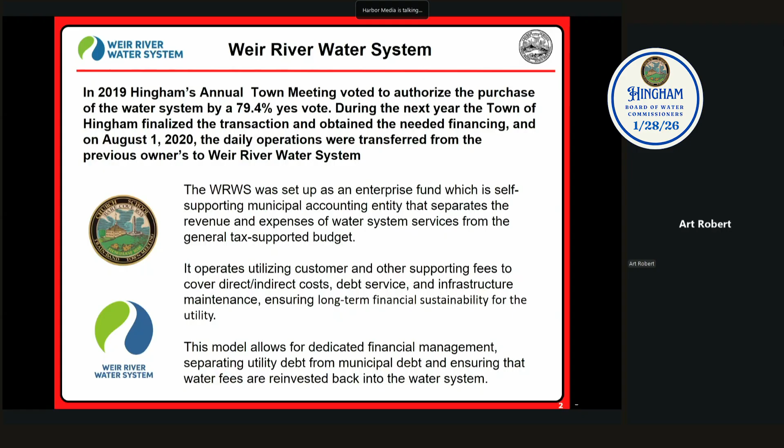What are our missions and services? To provide outstanding customer service to our customers in Hingham, Hull, and North Cohasset, while continuously supplying the highest quality water and improving the water system infrastructure. Our services include water treatment, distribution system operation and maintenance, billing services, customer service, 24-hour emergency repairs and response, capital improvements, public outreach and education, and water conservation.

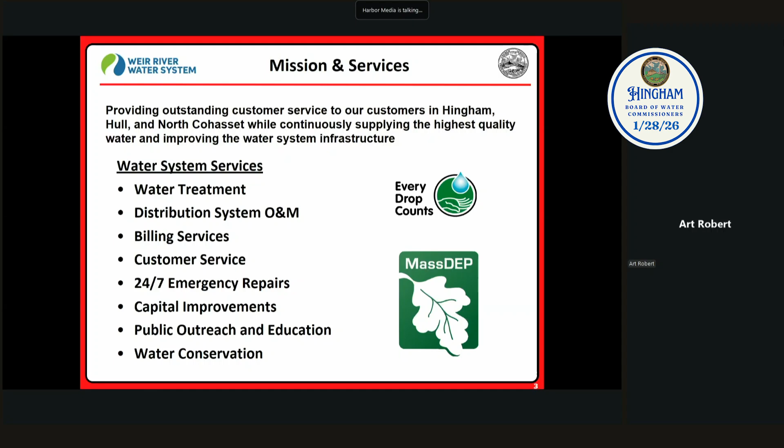What are our key initiatives? Our key initiatives are as follows: focus on water quality by continuously reviewing and improving our preventative maintenance programs, annual water main replacement projects, and annual water treatment plant upgrades. In June of 2026, we updated and improved our GPS coordinates and GIS mapping. I'll get into that a little bit deeper later.

In March of 2026, we're going to finalize a new meter reading system with a focus on accuracy and conservation. In January of 2027, we're going to utilize our new GIS system for asset management.

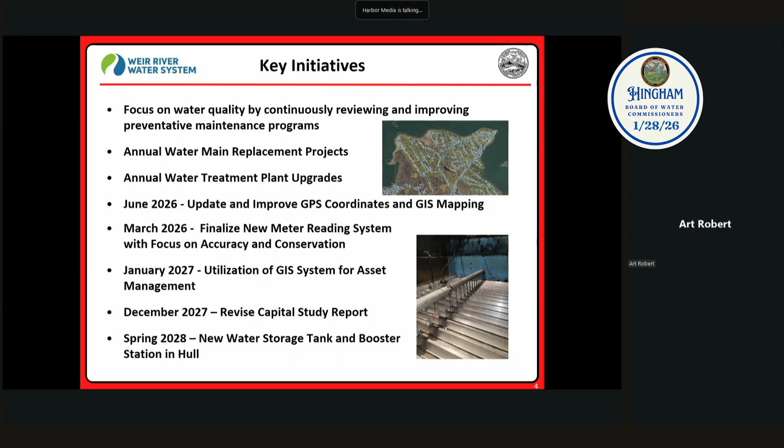In December of 2027, we're going to revise our capital study report. After doing all this work for 5 years, we're going to revise the report to focus on the areas that need to be focused on, because those do change as the years go on. In spring of 2028, we're going to have a new tank in Hull and a new pump station in Hull.

This is basically our contract operations, how it looks if you look at an organizational chart, with myself and Brian at the top, down through Veolia and everybody that works for Veolia. We also have administrative help from Liz Welch, who does work for DPW, but she does help us out from time to time.

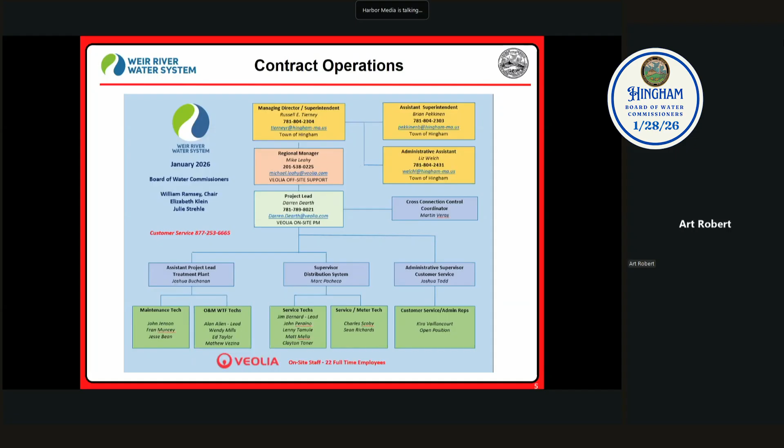Financial stability, what have we done? First 3 years, we were required to have a 1.0 debt service ratio, which is the ratio between our debt service and how much we'll have left over after our budget, so what we have for reserve funds. We met that in FY 21 through 23 to meet the requirements set forth when we bought the system. It was required by the lenders to make sure we met those requirements.

We have $1.5 million right now in retained earnings. That's about 10.3% of our annual revenue. Our goal for retained earnings is about 17.5%. We could go to 20, but we're going to stay with 17.5 until we reach it, and then we'll go from there.

Capital improvements over the past 5 years: $7.1 million in the distribution system and $5.2 million in the treatment facility. The MCAP, which is part of our contract with Veolia, they hold a certain amount of money, about $712,000 per year, which we pay them over the months. They have that money for repairs in the plant and the distribution system. It's not capital work; it's all the repairs and maintaining of the system.

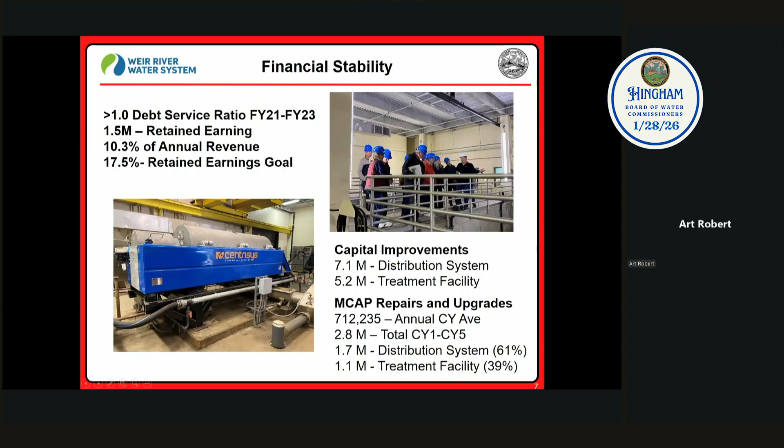More on financial stability: we secured a $2.7 million PFAS class action settlement. A bunch of towns got together and sued the makers of PFAS. We got in on this class action settlement and received a $2.7 million check, which has been earmarked aside for just PFAS treatment. Right now we're using it to do a study of the plant, which I'll go into more later, and we're also going to utilize it for any upgrades we need for the plant to meet the new PFAS regulations.

We also secured $250,000 in a GIS grant, which was part of going around getting GPS readings of all our assets and putting that into our GIS system, making it more useful for the workers in the field, for us in the office, and for everybody doing design work for the town, for the Weir River water system.

We also got a $750,000 lead service line inventory grant. One of the newest things is the state wants us to know what kind of services are on the owner's side of the house. On our side, we have documentation of just about every water service and its material, but we don't have documentation of what the owners have on their side. This grant allowed us to go through all of our records, digitize them, bring them into one big spreadsheet, and build a platform where we can go in and actually enter them.

So if we go into a house, we find out they have a copper service, we go onto this app, we put it in as copper service, and now that's going straight into the inventory. This inventory is part of the new lead and copper rule, which is kicking off later in 2027-ish, where we have to have this all done.

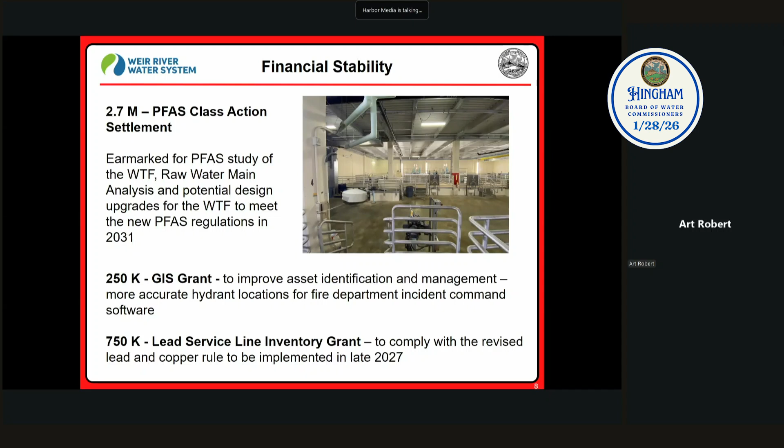Got it. Continuing with water quality. So per- and polyfluoroalkyl substances, which is PFAS, the Mass DEP MCL is 20 parts per trillion. Right now, the Weir River water system's running average is 5.12 parts per trillion.

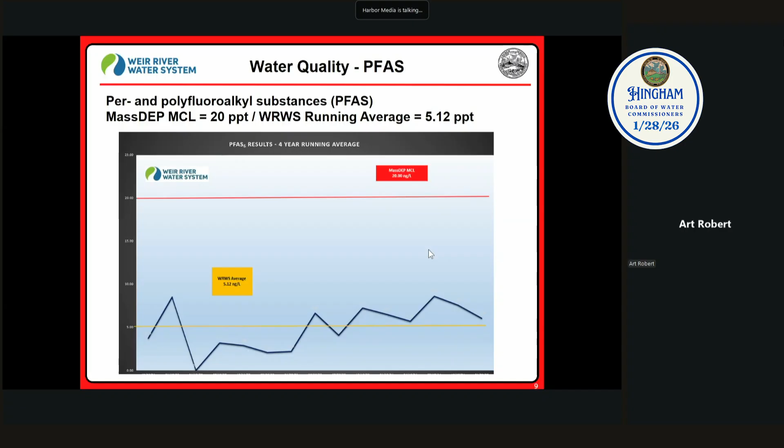So we are well below the Mass DEP regulations. The new regulation, if you look at this graph right here, the red line is actually the DEP MCL. This yellow line is our average, so we're well below. Every quarter we take these samples. If we exceed 10, we go to monthly sampling, but right now we've never exceeded 10, so we're doing well. And it's a rolling average, so if we do exceed 10 in one quarter, it's not until that factors in as a rolling average that we'd go over the 10. So if we do have a 10, we still have more time to make that up so we don't have to go to monthly sampling.

Water quality: the Weir River water system is in full compliance with the current lead and copper rule requirements. Our continued sampling under these current rules shows that our water system is below action levels. The Weir River water system exceeds the requirements set forth by Mass DEP on lead in schools.

What Mass DEP requires is that you sample a certain number of schools every time you sample. And if you do it on a 3-year schedule, a school could get sampled every 12 years. So we decided to be proactive, and we sample every single school that has children in it in this town every time we sample, every 3 years. We take samples there and pay for it on our own, and then we report those back to the school. In 2024, our lead results were 0 milligrams per liter.

The action limit is 0.015 milligrams per liter. Our copper results were 0.47 milligrams; the action limit is 1.3. So again, the Weir River water system meets or exceeds the Mass DEP sample requirements as outlined in our 3-year water quality sampling schedule.

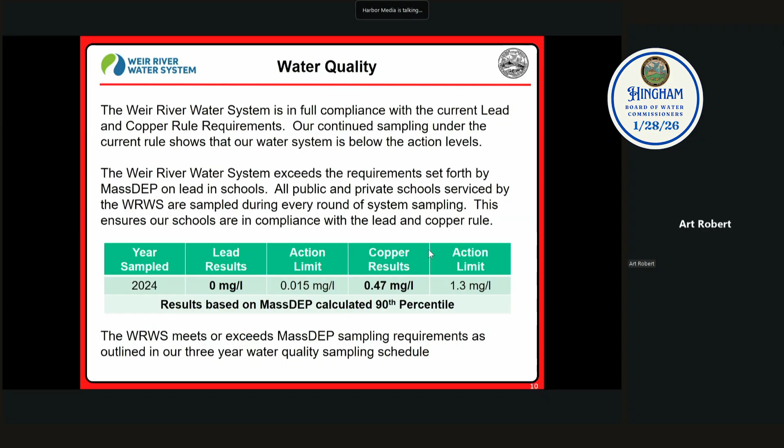More on water quality: sampling is focused on raw water, finished water leaving the plant, and distribution system parameters, which include total coliform bacteria. Again, we meet and exceed all those requirements. These parameters, along with our own in-house process control sampling, provide our operators information on the treatment process. We actually take samples every 2 to 3 hours in the plant. We have our own lab where we take samples and continuously watch and monitor what's going in and out of the plant. This allows us to make adjustments to our chemical dosing—we're not overdosing, we're not underdosing, and it just keeps everything running smoothly.

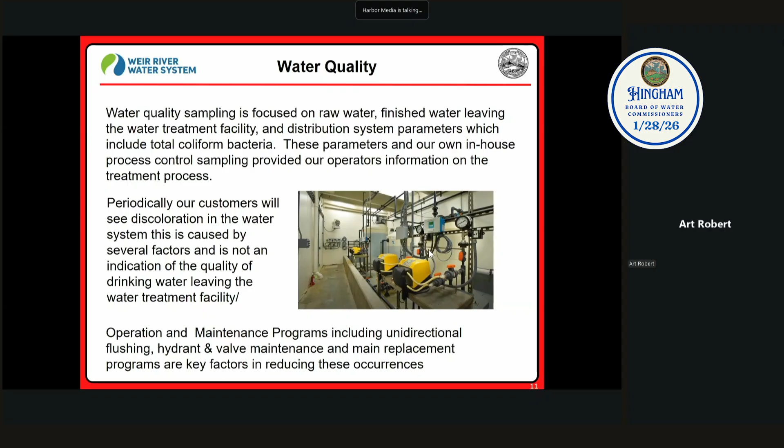Periodically, our customers will see discoloration in the water system. This is caused by several factors and is not an indication of the quality of drinking water leaving the water treatment facility—it is absolutely not an indication of that. It's in the distribution system. Operation and maintenance programs like unidirectional flushing, hydrant and valve maintenance, and main replacement programs are key factors in reducing these occurrences. Just for information: sediment disturbances.

Sediment disturbances and accumulated iron and manganese in the system—naturally occurring minerals like iron and manganese settle in the pipes over time. Changes in water velocity, such as from hydrant flushing, firefighting, or heavy demand, stir up these particles, and that's what everybody is seeing. System maintenance and breaks: a water main repair, valve work, construction activities can also cause sudden pressure changes as we're operating valves to do this work.

Again, that can also dislodge sediment from the mains. What are you seeing when you see yellow, brown, or red color tint in your water? That's an indication of rust and iron and some manganese. If it's black, it's 100% manganese.

If people have that in their water at any time, just call the office or send an email to our water quality email. We'll send someone out right away to open up a couple hydrants just to bleed off that manganese that's been disrupted from the bottom.

A milky cloudy appearance is usually caused by trapped air in the pipes. A lot of people don't see that unless we have a really high demand in the higher elevation areas. But if you see that in a high elevation house where you live, please call the office. We can go up there and see what's going on. Maybe something's closed that's not allowing the water to get up there, causing a little air pockets here and there.

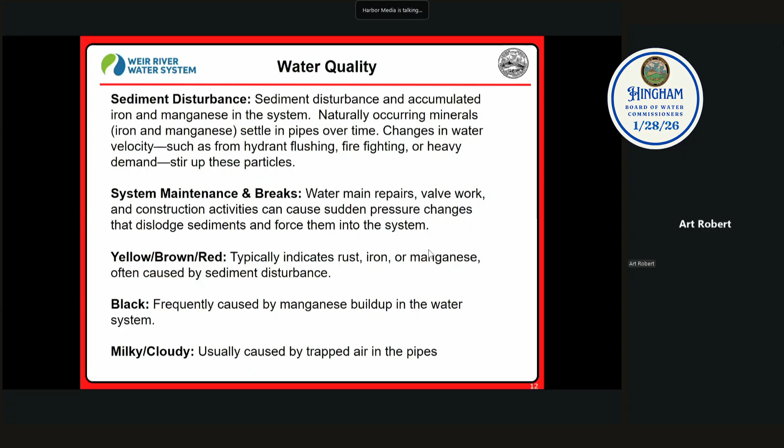I'm going to turn this over to Brian for 5 minutes, give my voice a break and give you guys a break from me. There'll be questions at the end, sir. No, it's just a comment about that — there'll be questions at the end.

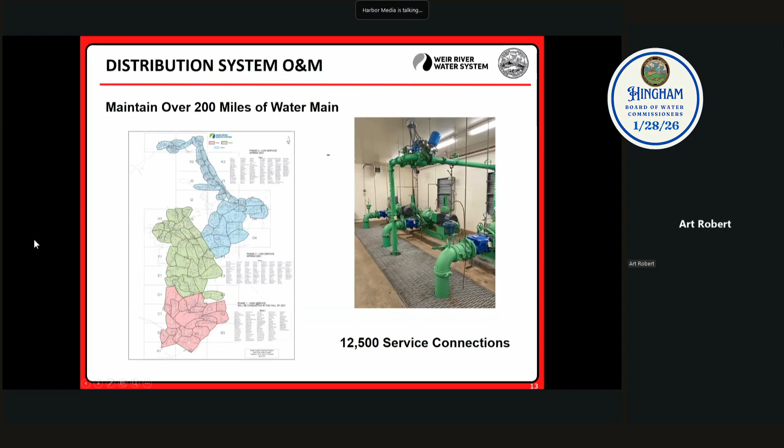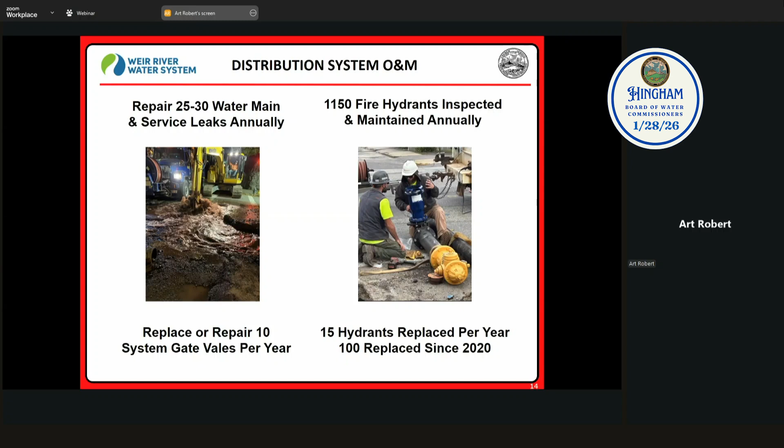We maintain over 200 miles of water main and 12,500 service connections. We repair 25 to 30 water main breaks and service leaks annually. We inspect 1,150 fire hydrants and maintain them annually as well. We replace or repair 10 system gate valves per year, and 15 hydrants are replaced, with 100 replaced since we took over.

This fall we started our annual system-wide unidirectional flushing program. I think it went very well, we started down in Hull. Part of that is also the 3,200 system gate valve inspections. We inspect 310 a year, which is really important for that program, because it only works if your valves work.

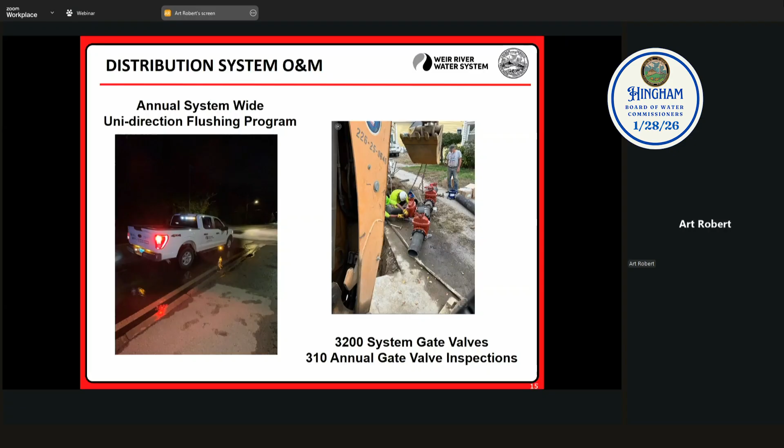The treatment plant is a 7.2 million gallon per day treatment facility located at 900 Main Street here in Hingham, and it was built in 1996. We treat and distribute 1.2 billion gallons of potable water from 11 water sources, including Accord Pond.

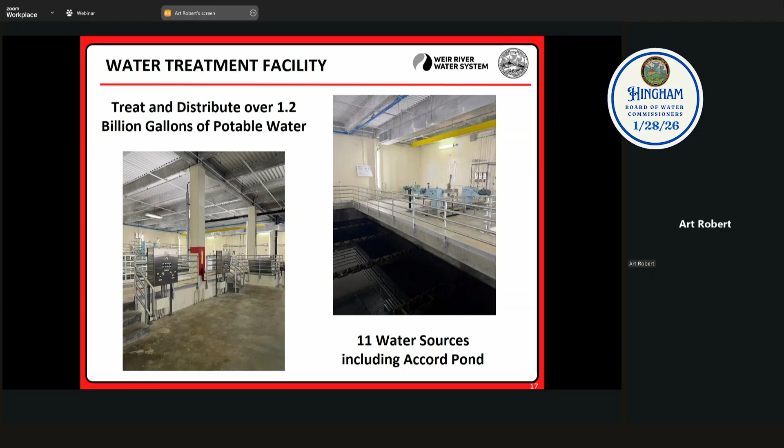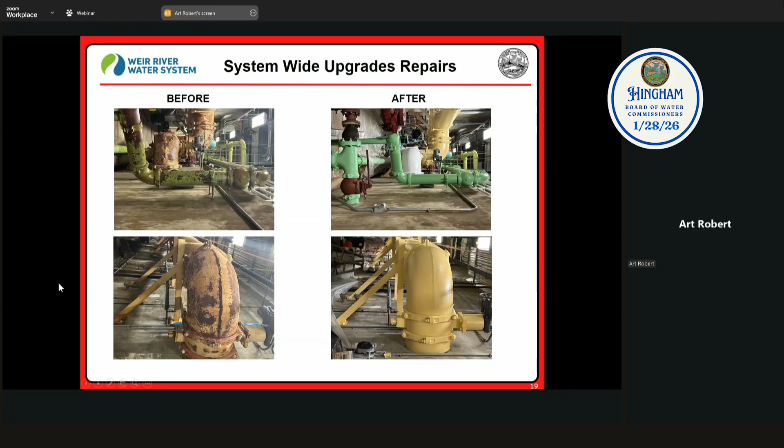This is one of the wells. We rehabbed the shed around it and painted the fire hydrant.

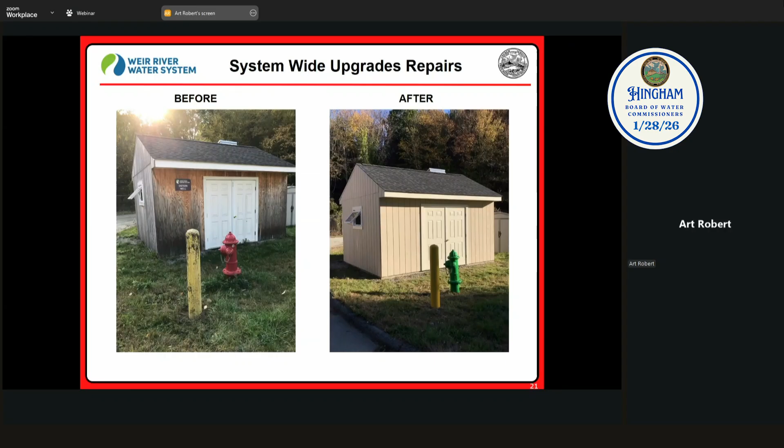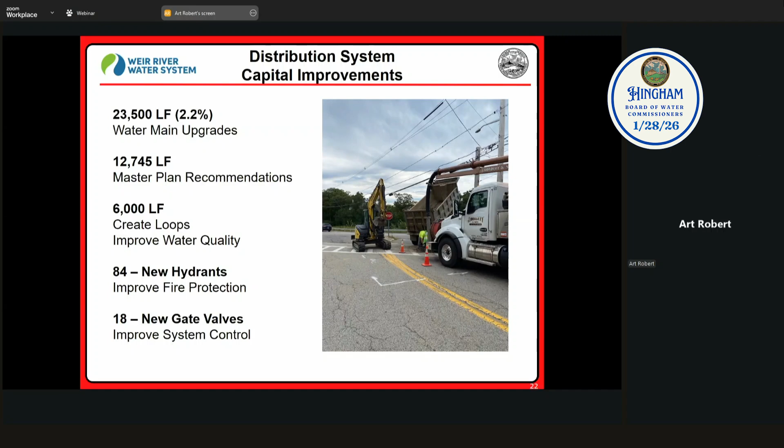Capital improvements so far: 23,500 linear feet of water main upgrades, about 2.2%, have been done. 12,745 linear feet of that was from the master plan recommendations. 6,000 linear feet created loops that help improve overall water quality. 84 new fire hydrants were added to improve fire protection, and 18 new gate valves improve system control.

I'll hand it back over. Thank you.

One thing we want to make clear about our O&M services is that those hydrants and valves done through the contract — we also do additional hydrants and valves and capital work and things like that. So it's not the only ones we're doing, but we just want to give everyone an idea of what Veolia's responsibilities are to the town with the water system.

Future plans: the need for a new water storage tank within the Weir River Water System distribution system was priority one in our master plan. So when we did the master plan in 2022, that was the first thing on the list — a new tank.

After reviewing what was proposed prior to us purchasing it, we realized that the tank was not only undersized, but it also could not be fully utilized the way it was constructed and designed. We immediately went in and did an entire new study, a hydraulic model and study, to make sure that the money we're investing is used to the best of our ability. What we did find out is we made a separate pressure zone.

So we're going to have 3 pressure zones going forward after this tank is done, because the best way to get this tank—1 million gallons in Hull—utilized properly and be a large benefit to the town of Hull and North Cohasset is to make it its own separate pressure zone.

What this does is gives us water system redundancy. Currently, we have 1 tank in the entire main service, which is Turkey Hill. Turkey Hill has not been rehabbed since the day it went up. That tank desperately needs to come offline and be completely rehabilitated. It won't be replaced, it'll be rehabilitated, which means we'll strip it, paint it, clean the inside, make some repairs, and then put it back in service.

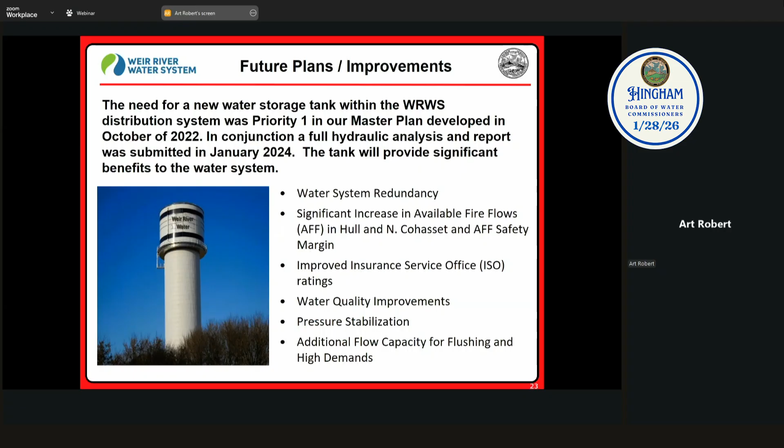A water booster station, pump station, was required to fill this tank to capacity and utilize it exactly how it should be done hydraulically. So we've now got a site in Hingham to fill the tank. We went and looked at 7 different sites. This was the best site for this—the most effective, the easiest to put it on—and we already have all of our approvals from the town of Hingham to put it there.

Again, it will reduce water hammer in the system. Water hammer is a part of a water system where if something changes direction or if there's a water main break, the hammer could actually cause even more problems than just that additional break. Water hammer is a big problem around here because of the fact that we do not have a tank in Hull. It could also potentially reduce the chlorine levels at the plant.

One of the things we looked at, and I was very hard on our engineers about, was can we add chlorine to the booster station so we can reduce the chlorine coming out of the plant? We have to maintain a certain chlorine level—we do get complaints about the odor of chlorine, but we need to maintain that level so we don't get bacteria in the water system. With this new booster station, we're adding a chlorine injection system where we can reduce the chlorine going in at the plant and then bump it up at the booster station. So instead of having 2.0 in the system, we can cut it down to 1.2, 1.1. Then everybody has the same amount, and it's not high right around the Turkey Hill tank or the treatment plant.

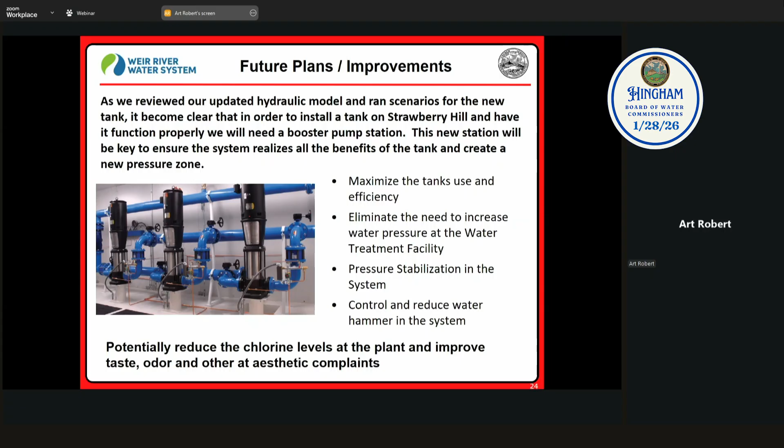Future plans for improvements: the Route 3A Rotary Summer Street project that Mass DOT is doing. We had a meeting today—these dates changed a little bit because Mass DOT hasn't approved our permits. We're working on that with our engineers to get it done, so we did get pushed out a little into maybe September to start construction. But again, we're on track. We're designing it, we're at 78% design, and that's a project for next year.

Manomet Ave and Samoset Ave—the town of Hull wants to completely reconstruct those 2 roadways. It's about 11,200 feet of 8-inch ductile iron water main. We were already designing it—I promised Hull that we would design it now, keep it in the drawer, and as soon as they're ready, we'll put it out to bid and do that job also. Then Main Street.

Main Street in Hingham has had a couple major water main breaks over the past couple years. We did do some serious investigation over there. Brian and a couple of engineers were out there for a couple of days. We found a couple closed gate valves. We opened those gate valves and the pressure fluctuations dropped significantly. So we are confident that that should stop these main breaks on Main Street. But again, we will keep a close eye on it.

We're going to do some other work to have an actually continuous monitoring system during the summer so we can always keep our eye on Main Street. It's the only area in town where we've seen this happen, where there's been significant fluctuations in pressure, and it cracks a 12-inch water main, which is about 1.25 inches thick. So we're going to keep our eye on that.

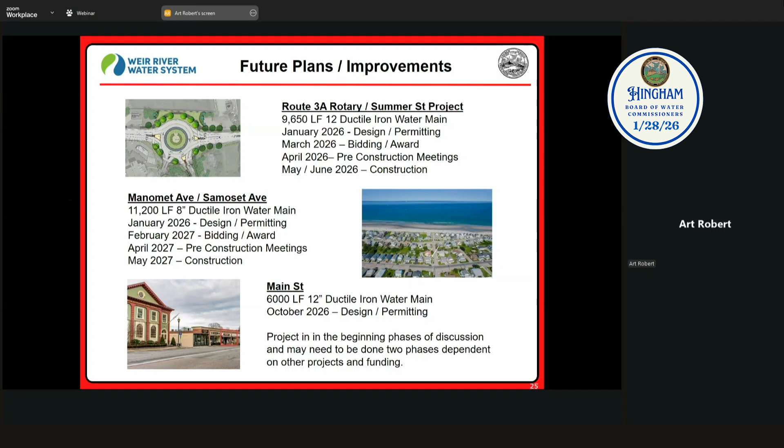PFAS capacity study. I was just talking about the PFAS money. We took the PFAS money and have a capacity study - are we going to be able to meet the 4s? In the future, there are 2 PFAS chemicals that you're going to have to get to 4 parts per trillion. Currently we're at 20. They've decided those 2 need to be at 4. Currently, 99% of the time, we meet that 4 the way we're treating right now. If our carbon gets depleted, it starts to go up a little bit.

So in an effort to make sure that we can meet that 4 by 2031, we're doing this study. We're going to look at the plan on how we can improve the plant and maybe add carbon filters or something like that to make the plant meet that 4, which is going to be required.

We have a new intake at Accord Pond. Upon the purchase of the water system, about 2 years into it, we realized that the intake that was about 300 or 400 feet out in the pond had been abandoned. They were using an intake that was closer to the shoreline. After we found this out, we took action to get it designed, and right now it's being replaced. We're going 427 feet into the pond at the best depth.

We took water quality samples all over Accord Pond to find the best water quality in the pond, and this is where it's at. It's the lowest PFAS, the lowest fecal coliform, and the lowest turbidity in the pond. So we've now put our intake at the best place in the pond to take water from it.

Then we're doing a raw water main analysis, part of the PFAS study. Some of our wells have some elevated PFAS, so we use those wells sparingly. However, this summer a couple of the raw water mains were not giving us enough water, so we had to switch to other wells. I brought in someone to look at those because we think there could be some kind of restriction in those raw water mains, so we're going to look at all of our raw water mains.

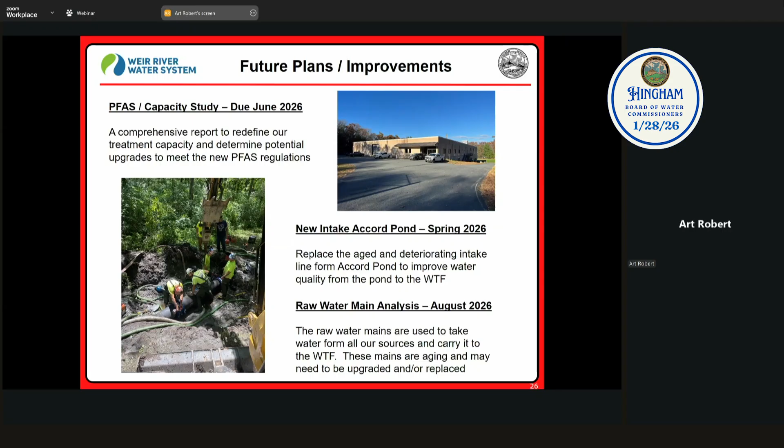So for people that don't understand, all of our wells and all of our sources come back to the plant on Main Street. Nothing that comes out of the wells goes directly into the distribution system. So these raw water mains are very key to the success of our water system, to get us the water to the plant so we can treat it and get it out. So that's ongoing also.

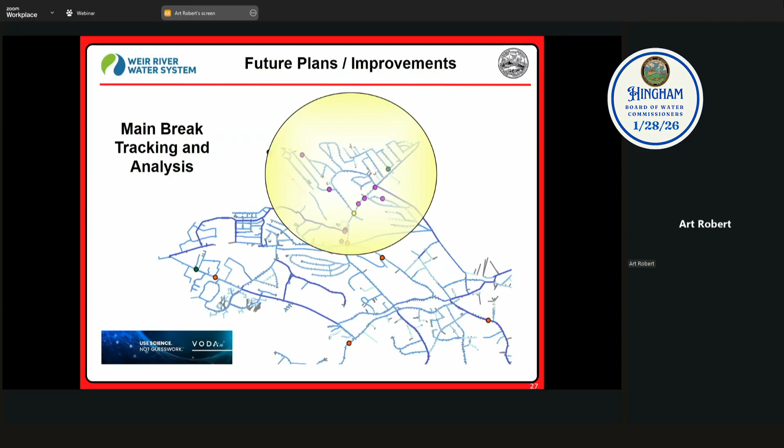This is what found our closed water main valve on Main Street. We set up 7 of these all around downtown Hingham and we found fluctuations in pressure. Then the engineers did their thing and pointed it down to a couple valves, checked those valves, and found out that they were closed. One of them had been broken closed, as far as we were aware, for 12 years, and we didn't know it was broken. That has now been repaired, replaced, and reopened.

And we have vaults. There are 12 vaults in the entire water system that were put in at one time for these pressure recorders. We went around, located all the vaults, and we're looking at them. Are they viable for us to use again? We're working on that now. That's another project we're working on.

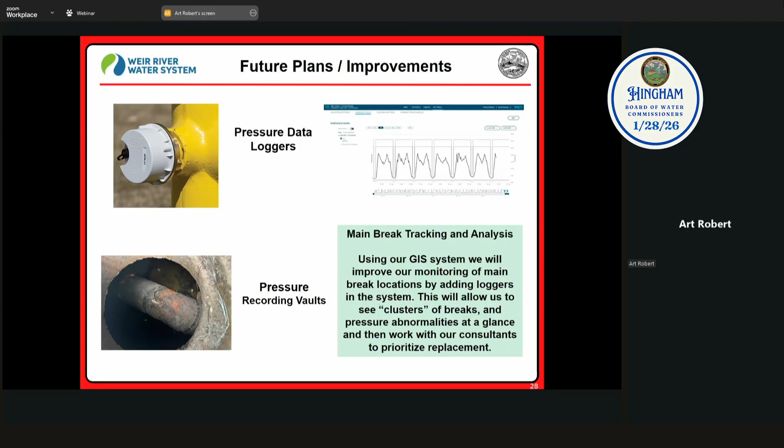Future plans: improvement, drought conservation measures. The Commonwealth of Massachusetts puts out drought measures every year. Currently we have a registered water supply. There are water supplies under the Water Management Act, controlled by Mass DEP. Registered water systems have a little, I'm not going to call it leeway, but it's not the same thing. We don't have restrictions, we don't have things we have to meet and all those things. But the problem is we do fall under the state's drought management.

Currently we are working on a new drought management plan to match the state's. So if the state's in a level 0, we're in a level 0. If the state's in a level 4, we are in a level 4. What that means to our residents is if we go to level 2, we cut down on watering. Level 3, cut down on watering. Level 4, no watering. We are working on that right now. I have it drafted, I have not presented to the board yet, but we're going to try and implement it in the spring.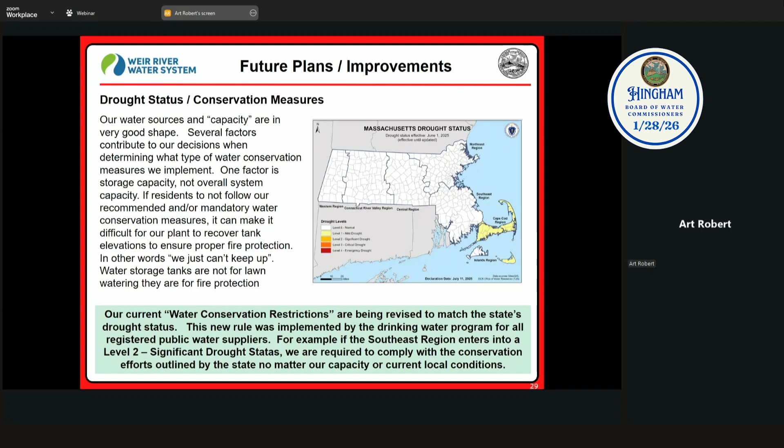It's kind of what it looks like. Level 0 is normal, level 1 is a mild drought, 2 significant, 3 critical, 4 emergency drought. Again, we will craft different watering plans for the summer and spring based on what the state is.

The other problem is this thing changes all the time. So every week I can go to a meeting, or get the results from a meeting from the drought task force, and they could change it from a 1 to a 2, then the next week go from a 2 to a 1. So it's going to take a lot of communication and effort to make sure we're matching the state. Last year I believe we only got to a level 1 mild drought in Hingham in this area.

Just for information, a healthy lawn only needs 1 to 1.5 inches of water per week, over 2 to 3 days. Watering deeply and less frequently encourages strong growth, making your lawn more resilient to heat. So if you water your grass every day and drop an inch of water every day, the minute it goes to a drought situation your grass is going to die because it has no resiliency. If you follow this, and anyone can look this up on the internet, I've researched the heck out of it, this is exactly what every professional water person and lawn person says. Water it 3 times a week, but water it heavy. That's what you do. Don't water it every single day.

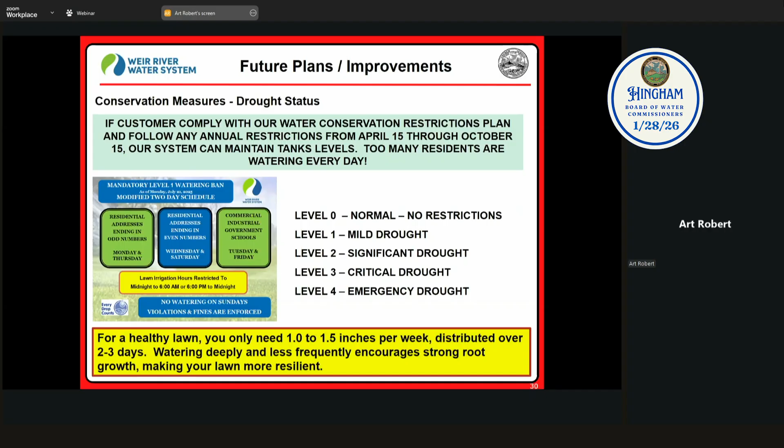More for our conservation efforts: advanced metering infrastructure. We put a bid out to look at an AMI system. What an AMI system does is it sets up the meters around the town, and we report directly to a master computer in my office. I don't know where it's going to be, but we're going to probably put it in customer service, and we will have all access to it. What this does, this is good, this has 3 or 4 things that we're going to be able to do.

One is we're going to go to monthly billing. Right now we do quarterly billing. Quarterly billing is very difficult for the water system because if someone has a large bill over 3 months, we don't know when it started, we can't even pinpoint when it started. If we have monthly bills, now at least we're capturing these issues earlier.

I'm going to go one step further, we can see this every day. So I can log in, pull up Mary's address, and say exactly how much water she used the day before. It reports every 24 hours. What that does now is, if we're in a drought situation and we go to 3-day-a-week watering, and I see somebody watering outside of that, we can find them.

So it's definitely the way to watch and conserve water and also allow us to catch leaks faster, home issues faster, for residents that leave their homes and go to Florida or something but leave their homes active. If a water pipe breaks in their house, we will see it the next day. We'll get an alarm. I know the next day is probably not what everybody wants, but it's better than 2 months later when you come back home and your sofa's sitting up, 3 feet of water on your front grass. So that's where this is going.

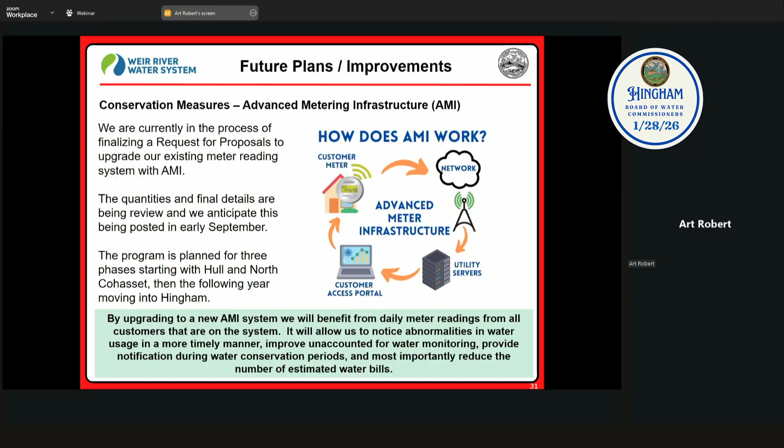Future plans with billing. I don't know if everyone knows this, but we are moving to a new billing system with HMLP. What that means to our customers is nothing. You guys are going to get a new bill, it's going to look a little different. We will do the same thing we did when Veolia took over. We'll send out what it's going to look like, how it's going to work. What this does for us is we are going to take the savings that we get from having HMLP do our billing and put it back into the water system.

Currently, we pay a certain amount of money to have our bills done by Veolia. HMLP and I have been working together for a long time, and we can do it less expensively. What that also does is there's a lot more customer service representatives at HMLP. We have 3 currently at our office, they have about 6 at their office. That gives us a total of 9 customer service representatives to talk about water, electricity, and eventually sewer in Hingham.

We're currently working with our vendors to combine electric, water, and sewer bills. The bill looks a little crazy right now. We're really trying to work on this, so we're definitely trying to make the electric and water and sewer on one bill. If it doesn't happen, I'm sorry, but we want to make sure the bill's readable and legible. But water and sewer will eventually be on one bill.

We're looking at probably July of '27 for the sewer to come over, because everybody knows in Hingham, sewer is, not back charged, but you're behind 6 months. So when you get your bill, it's 6 months ago. We're going to try to bring that into the monthly billing with our bills. We want to give everyone a year to get caught up, because you're going to have a bill, and then we're going to give you another bill, and then, like we did when we switched over the water system, there was a little extra left over from Aquarian, and you had to pay that, unfortunately. So we're going to allow people to have time to pay that portion of their sewer bill that's going to get looped into this transition.

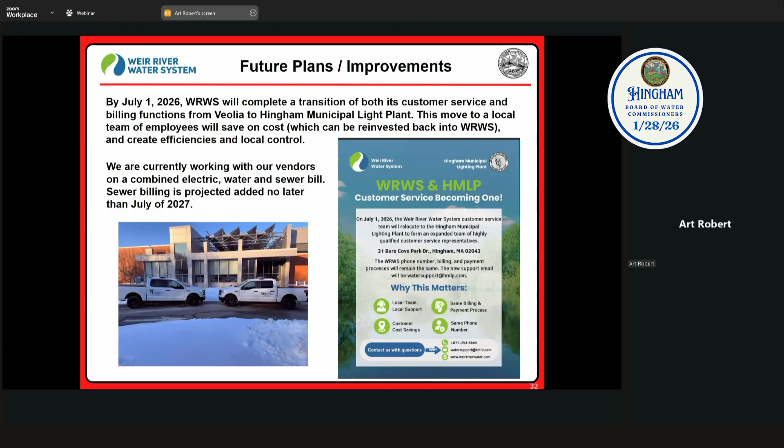So we're working hard on it. We were going to try and do it by July 1st, 2026, but we don't want, it's going to be too much confusion, and when you make a billing change like this, you want it to go smoothly. So water goes first, and then over that next first year, we will be working on the sewer billing.

What's your bill going to look like? So in July of 2021, FY22, the Weir River Water System implemented a 10% rate increase that was included in the information provided for the acquisition and final vote purchase of the water system. There's been a significant cost increase in our operations and maintenance efforts, including but not limited to supplies, materials, and labor. Even with these rising expenses, the proposed rate increase remains well within the range that was anticipated when the system was acquired. There was a look at maybe 10% every 3 years. This is still in line with that. This is a result of our continued commitment in operating the system efficiently and responsibly on behalf of the communities we serve. What this is saying is, since 2021, 5 years later, our operations contract went up 32%.

Everybody don't jump on Veolia. A lot of that is chemicals, because the contract includes the chemicals, and chemical prices have gone way up. Water meters have gone up 45%. So the cost of a water meter has gone up 45% since that time.

Water meter radios have gone up 24%. Brass materials have gone up 20%. Water service pipe and ductile iron fittings have gone up 38%. Finally, our well testing and rehabilitation has gone up 14%. We test our wells every year, doing a capacity test, cleaning them, and replacing anything that's broken, and that cost has gone up 14%. So all these things have increased significantly since we bought the water system.

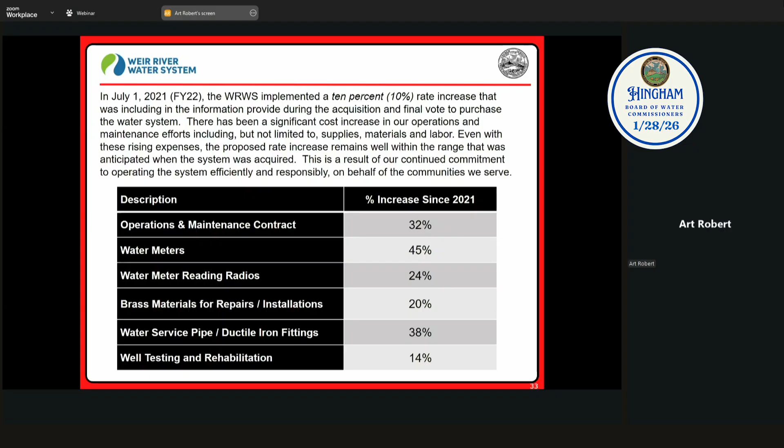And it's not just ours, it's everybody's, across the board. So here we are. In order to continue with the needed improvements, upgrades, and operation and maintenance of the Weir River water system, we're proposing the following increases in assessments to take effect on July 1st, 2026.

A 3% rate increase, and then a $65 a year capital debt service assessment to single-family residents. What that CDSA is covering is the tank, the booster station, and the rehab of the Turkey Hill tank. Multi-residential, industrial, commercial, and municipal government customers will also contribute to the capital debt service. Their cost is different than the residential, it is more, and they will also be doing this.

What that comes down to is this: we anticipate the average water bill will increase about 8% with the capital charge. Now, that $65 a year capital charge is only for when we bond the tank. Once we're done, we're going to bond the money for the tank and put it over 30 years. That charge will drop off after 30 years, it will not remain on the water bills.

Sometimes when you build these things into the rates, they never come out. So we want to make sure that we use that money just for that, and then in 30 years it's going to drop off. At the same time, the cost of the water system will drop off, and I won't benefit from that, but that's okay.

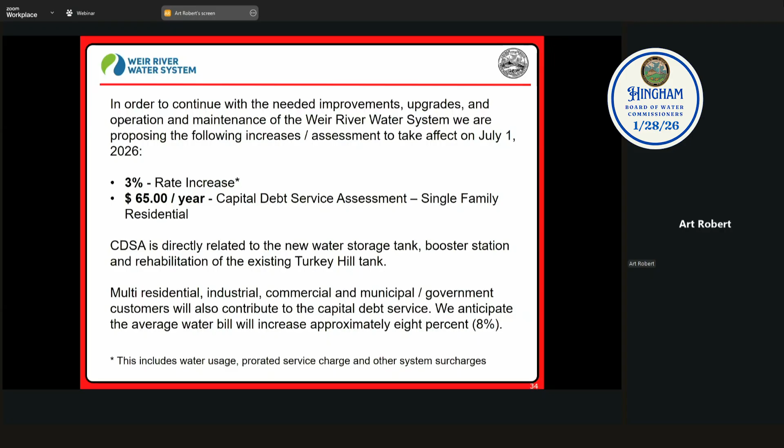We did take a bill that we thought was very representative of the whole system, because this person, if you look at the usage, it looks like they water their grass, they do all those little things, they might have a pool. We didn't want to use a smaller bill because it's not a representation of the entire system.